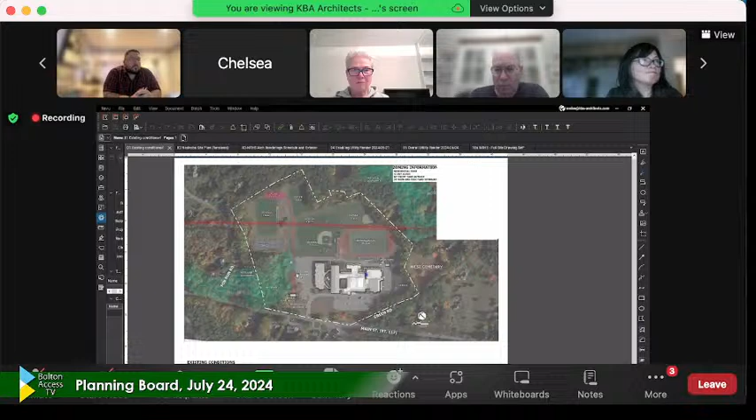That project, which is underway right now, is installing geothermal wells underneath the existing tennis courts, and also moving a lot of the parking up front in front of the school so that we have all the parking we need once school starts again in the fall. We're also rerouting all the utilities around the building and that force main so that we're not disturbing school programs in the fall. That's why we broke that out as a separate project, because we were in a rush to get it done.

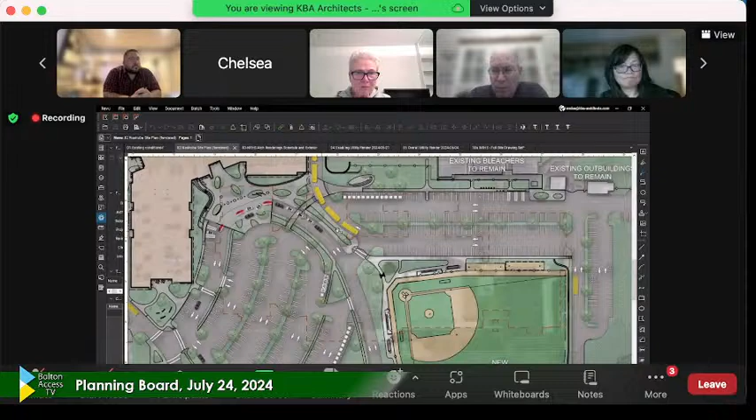So that's the existing conditions. This is the proposed site plan. The existing building is in here, outlined in red. We are building the new building just to the west and north of the existing building, leaving it intact as we're constructing it. Once the new building is online and we've moved into it, the old building will be knocked down and the athletic fields and parking will be constructed.

So as part of that, I'll go into what we're calling the enabling package, which is what's happening right now. That's this parking area up front, which we've expanded, and that's in process. We're installing three tennis courts, which are going to be permanent. This parking lot is temporary, but the tennis courts are permanent, so the school has tennis online, because we've taken the tennis on the east side of the site offline to drill a domestic well there.

And we've also taken the western courts offline for putting in geothermal wells. There's a series of geothermal wells there. If you're not familiar with geothermal wells, you're not extracting water out of the ground. It's a closed loop pipe that goes down into the ground and comes back up, so it's the water running through that closed loop that's providing the geothermal benefit. We're not removing water from the ground, which is usually a concern—just transferring the energy from the water to the ground. Correct.

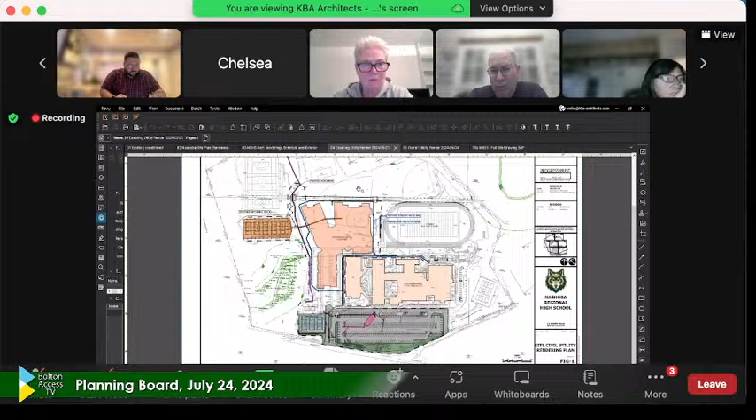So that's the enabling project. Let me get back to the site plan again. So once that's done, as I stated, the existing building will be torn down and we'll build the parking lot, the bus drop, and the baseball field.

What happens is when that rotary gets built, the idea for traffic circulation is that buses enter the new entry, basically where the existing entry is, on the west side of the site. Buses circulate around the back of the building, drop off at the east side—southeast corner—of the building, then circulate out, and only buses exit onto Green Road. Parents come in for drop off, stack along the driveway here, drop off at the main entry, then circulate out back to the rotary. So that's the traffic circulation happening there.

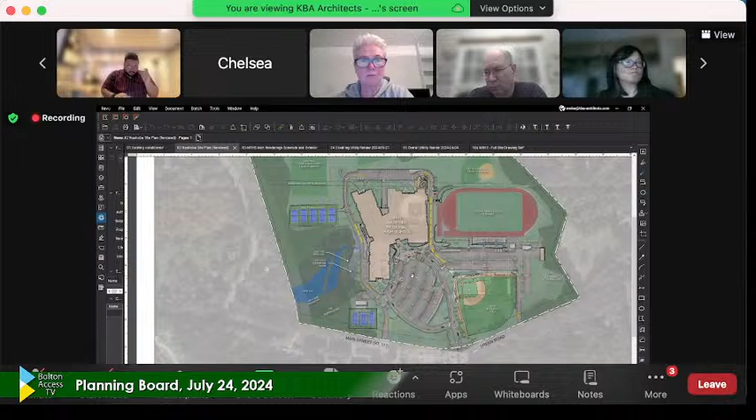As far as parking is concerned, we have all the handicap parking. Sorry, Eric—is the entrance on Green Road the same one that exists today? It moves maybe five feet to the east, but yes, it'll be pretty much the same one. Okay, thanks.

The track and field facility stays almost exactly where it is. The only things we're doing there are providing a new handicap accessible lift to the press box. To get everything in for this new building, we need to bolster the wall on the west side of the existing track in this location. We're also building a handicap ramp to get from the lower level of the school up to that track level. This track is about 14 feet above the finished floor level of the new school.

Once we're done with all that, the contractor is going to use where the existing tennis courts are or were for their trailer farm and staging equipment and materials during construction. Once they're done with that, the area gets remediated as far as regraded, and then we're putting in post-tension concrete courts, basically in the same configuration that is out there now, or was previously.

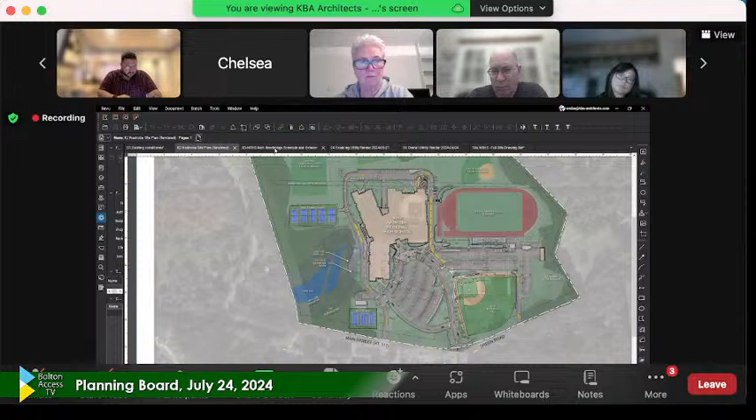Joe, do you want to talk about schedule a little bit? This is the schedule from one of our MSBA presentations.

The enabling package was bid and is underway. The purpose of that is to be sure that the school in the fall is construction ready, so that construction can proceed, but that any utilities, parking, or safety egress has been constructed previously, so the school can just open and function and not be working around the construction. That's a big push over this summer to get completed. It's always a summer slammer, as we call it, and that's on process now and underway.

Under bid right now is bid package 3. That is for site work, not including landscaping, structure for concrete and foundations, and elevators. Believe it or not, we're doing elevators because we need to make sure the elevator pits coming from the specific elevator company are in place so we can make the foundations the correct size. Also, elevators are notorious for people not bidding them, and they wind up getting put out to bid after as part of a general pickup package by the construction manager. We want to make sure we don't have a delay later in the process by having that bid too late.

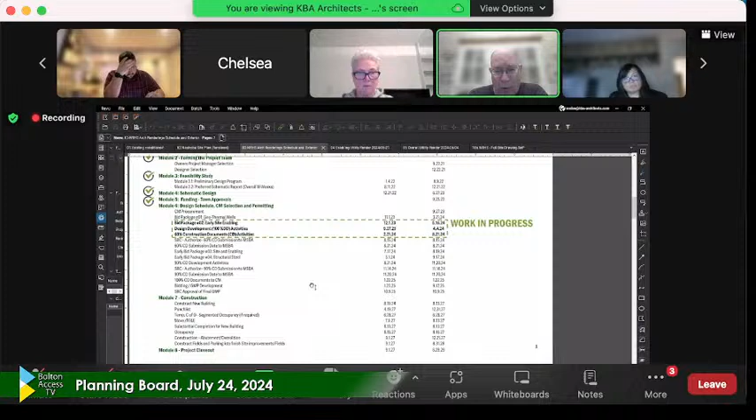Following that in October will be another early bid package, not on this list, because we've only just decided to issue it for pre-purchase of some electrical switchgear equipment and the generator. What our construction manager has found recently is that electrical equipment is taking up to 16 months to procure and get on site, and rather than have a delay in the working of the building, we've decided to give ourselves a few months of buffer to purchase that earlier than would be purchased under regular bid.

Through the electrical filed subbidder, and then coming up after that in January of 2025 will be when the majority of the project is bid for all the major filed subtrades: HVAC, electrical, mechanical, plumbing, fire protection. The architectural packages will bid at the same time: masonry, drywall, etc. That buyout will probably take anywhere from 4 to 6 months to complete, with a GMP expected sometime, I believe, in May or June.

Mary Ann, is that what your anticipation is also? Muted. Definitely mute. Okay, and that's really it.

Joe, real quick, that was... Hey Joe, go ahead, sorry. The dates, can you scroll up? What do the dates represent? The opening bid and when the bid closes, or when the work finishes? I just can't see a header on what those dates represent. Oh, there we go. Start and finish. Okay, yeah, it's generated from a Gantt chart schedule. Yep, okay.

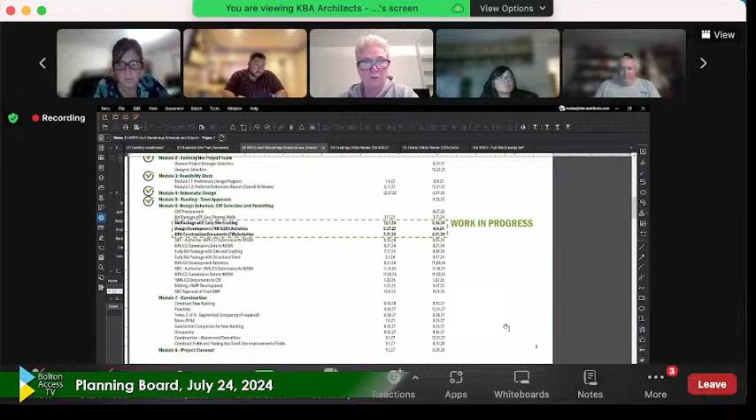So in the package you've got right now, you've got the site plans, the stormwater report, as well as some basic renderings of what's happening on the site, the basic floor plans we're working with, and some of the exterior renderings we're proposing for the site at this point. These should all be in that package, or if they're not, let us know.

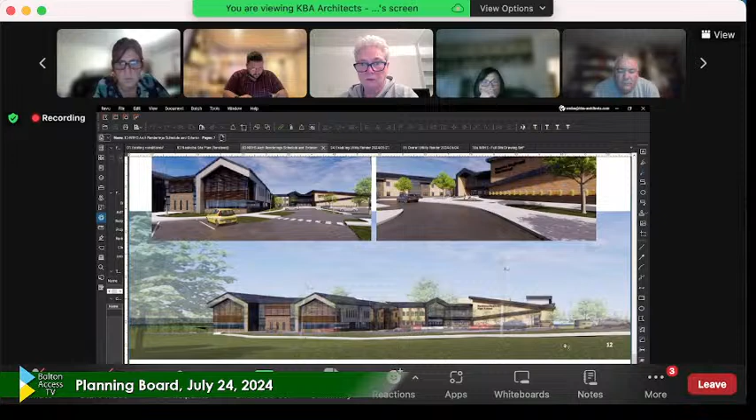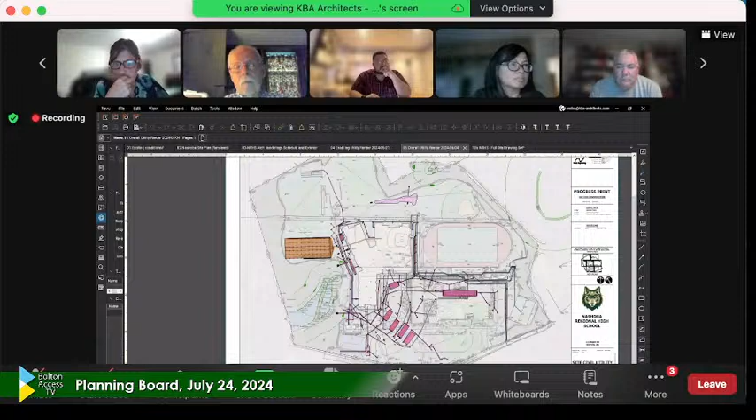So overall, utilities wise, there's a lot going on. We've been working with Concom on a lot of this. Concom has walked the site twice now. We just staked out some more stuff for them earlier this week, and they're going to get out there again hopefully this week. We're hoping they're approaching a point where they can vote on the project. We've been in front of them since May with the full project.

But here you could see a lot of these systems in magenta are the underground storage systems we're proposing. It's really a nest of underground systems, mostly because we're trying to work around the existing school building and trying not to rebuild as much as possible from what we're putting in temporarily and what we're doing permanently.

We are saving the existing outfalls at the existing wetlands where we can. And we are also creating some rain gardens, one in the back of the site, and there's one up in the front of the site also.

One of the issues is you'll notice we're not crossing that gas pipeline with any drainage. That's because Tennessee Gas gets a little jittery when you're putting a gravity-fed pipe over the pipeline, because that could always change during construction and that would throw everything off. So we've designed around that by getting all the drainage on one side of the pipeline and then having this rain garden basin on the other side of the pipeline going off into the woods.

How deep is the Tennessee Gas pipeline buried? Varies between 3 and 5 feet right now. You can't exceed 9 feet of cover. We've had extensive discussions with them, and actually Tennessee Gas's site work is managed through a company called Kinder Morgan, and their site representative has been on site virtually every day so far since the site work has started for the enabling package.

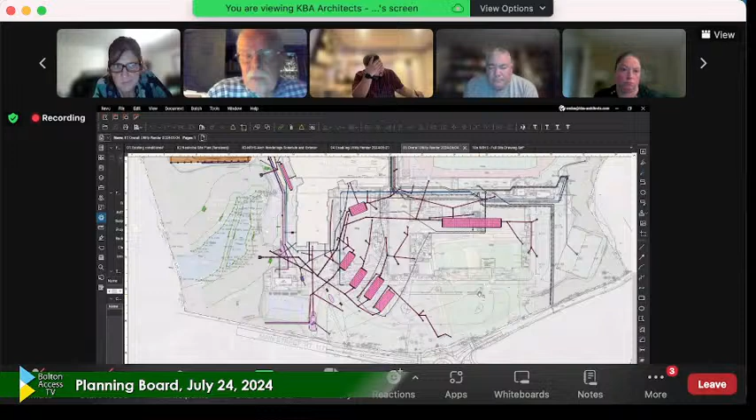Are you increasing the service going into the new school? No. Really? Okay. No, this is a new requirement that just came out in a recent guide from NGrid. We got an extensive back and forth with them a few times, and an extensive email from them explaining why — the gist of it was that they don't have the manpower to look at stuff twice. So give us the final plan and then we'll start.

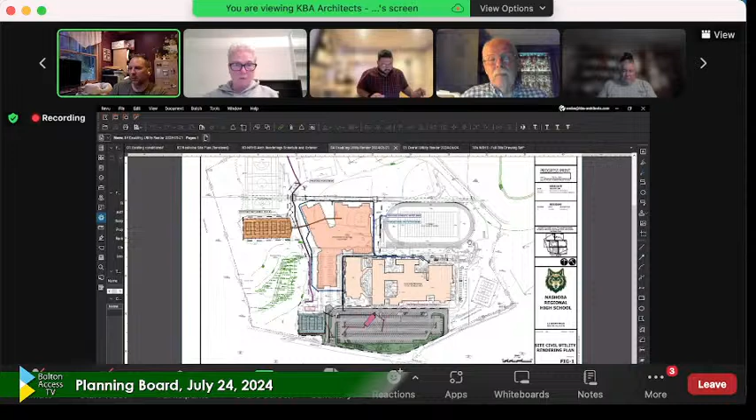On the previous sheet, the pink structures were all underground drainage, correct? Yes. And the goal is these are going to be installed now, presumably? They're on site now - just this one here is going to be installed now, and that stays in place. And that's sufficient for that size of the temporary parking lot you're putting in. Correct.

And then for the final phase, you're just going to tie into that and add on the additional - that one right there. Okay, I see. Exactly, yeah.

Can I have an additional question about the drainage? I understand that it meets state standards. This is a building that's going to be around for the next 50 years. Has anybody done climate change extrapolation of precipitation for this area, and whether this system, using the criteria and the state standards, would handle it?

We have not done extra calculations, but we can certainly look at that. Yeah, in view of wanting this building to be around and not be modified any more than necessary, that probably would be prudent. Yes, we've been discussing that internally as a standard practice through our company, so we'll go back and talk about that some more.

Thanks, and Chelsea, you broke up a little bit earlier - is the water being treated as it's discharged, or does most of it just discharge into the wetlands on the west side? Everything in vehicle areas gets treated through infiltration anyway - anything in vehicle areas gets pre-treatment prior to infiltration. So very little runs off without any sort of treatment, really only anything that goes on the grass. The tennis courts go into infiltration systems. Okay, thanks - so almost everything gets some sort of treatment.

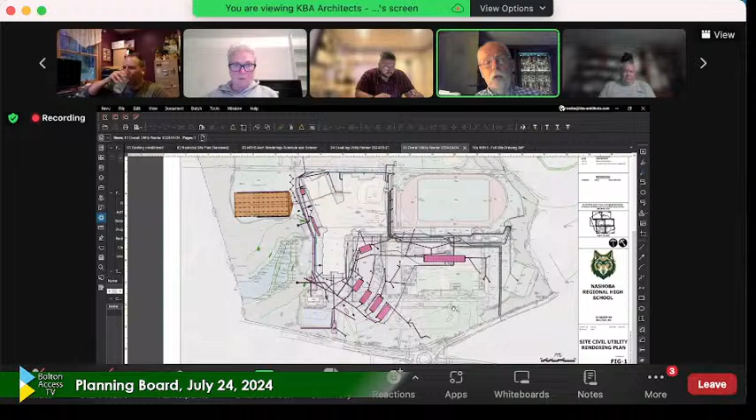And on that point, is there any kind of monitoring or oil water separation system to assure that you don't get anything from parking lots into the wetlands? We don't have monitoring, but there's an operation and maintenance plan that's required, and oil water separators as part of the treatment train that you will see in the reports. Good, thank you.

Yeah, this looks great, I'm really excited for the new school. My oldest daughter unfortunately won't get it, but my son will get 2 years out of it, so he's excited for that. Anyone else on the board - well, my grandkids will see it in 10 years.

Anyone else on the board or on the call have questions? I do - my question's on the gas pipeline. Can you speak at all to the setback requirements of the pipeline to the new school?

There's a 25-foot buffer straddling the pipeline that we're required to maintain. Anything that's crossing that, whether it's a driveway or a sidewalk or a force main for the septic, has to go through Kinder Morgan for their review.

The pipeline goes basically from like Tennessee or Pennsylvania all the way to Maine. It's got an easement that runs basically all the way up the eastern seaboard, and it's only tapped off when you have a major supply place to take off that gas. It's not necessarily high pressure, it's just high volume that's transferring it from one place to another.

The 25-foot buffer on the gas pipeline is considered by Tennessee Gas to be more than sufficient for the work going on, and the clearances above the pipe that we have to maintain, both for surface grade and for any crossing utilities, is also reviewed and approved by Tennessee Gas. Whenever we do any work within spitting distance of that pipeline easement, there needs to be someone from Kinder Morgan on site to observe and approve the work, so there are no mistakes or issues that would lead to a future problem with the pipeline.

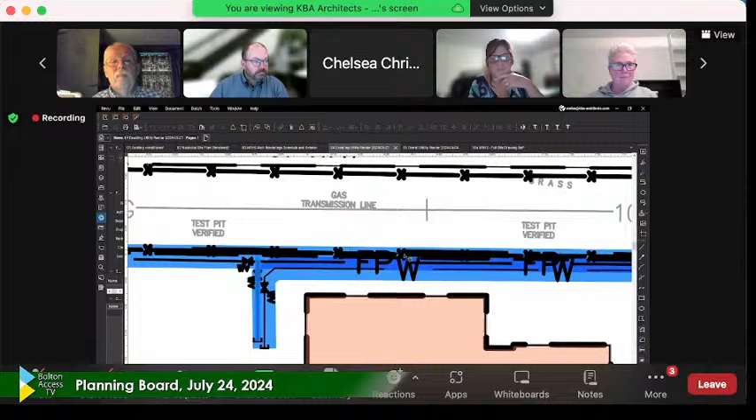We did have to do, last fall, some vacuum excavation along the pipeline to establish the grade of the pipeline in relation to the existing grade, and had it surveyed. There wasn't any real documentation as to that, since it was put in way back before the original school was built. So we had to do some documentation to verify where that was, so we could validate where we're crossing and the coverage we're going to provide.

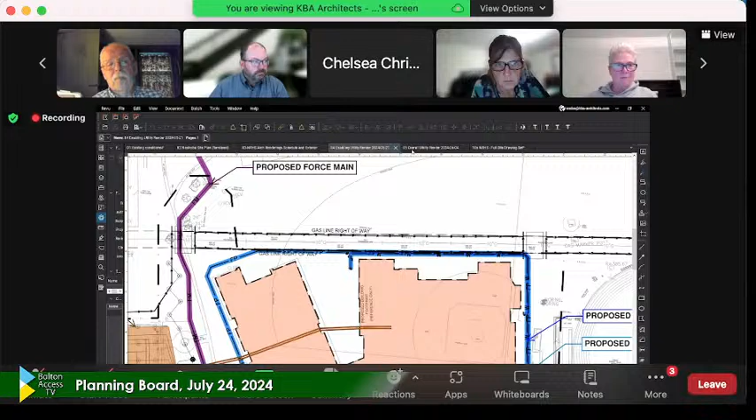I can ask the representatives from Tennessee Gas or Kinder Morgan what the pressure is in the gas line, if that's something you want to know. I am curious, seeing the proximity of the new building to the existing gas line, whether Tennessee Gas's regulatory agency is aware of it, or needs to be aware of it, or if there are any additional measures needed due to the new proximity.

Maybe an automatic shutoff valve or something like that might be needed. Yep, we can ask - it doesn't hurt to ask about the proximity. We can do that. Has the regulatory agency been on site, or the company? The company, Kinder Morgan, who manages the pipeline for Tennessee Gas, is on site.

I'm not sure who the pipeline regulatory agency would be. Did they pack the pipeline in the fall?

Is there significant variability in the pressure? If they pack the pipeline - what does that mean? I don't know what that means. Most gas companies, in order to accommodate increased demand in the winter, increase the pressure and use the pipe basically as a reservoir for gas. It increases the pressure at times and then reduces it substantially with demand. Okay, so you can ask that question too.

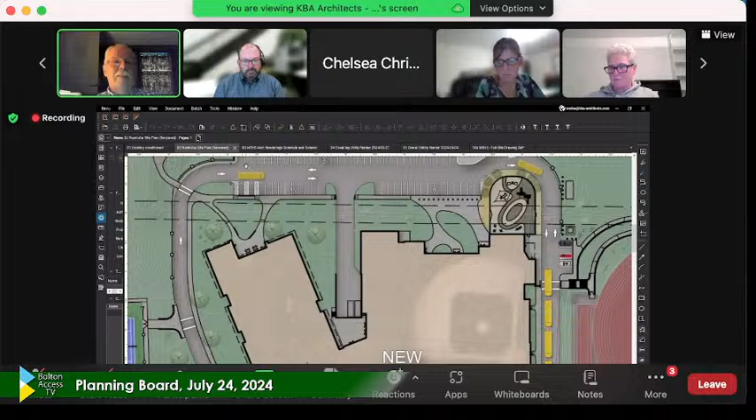That pipe runs through a lot of town. I'm sure everyone's aware when you drive around - Green Road, Harvard Road, Sugar Road, all that area. Although the building can't be on top of it, it wasn't as close before. There were playing fields, the baseball field was right on top of it, and the retaining wall for the existing football stadium is actually within the easement. They're not too happy about that, but we're not moving it at this point.

I'm not terribly concerned, I'd just be comforted by the answer.

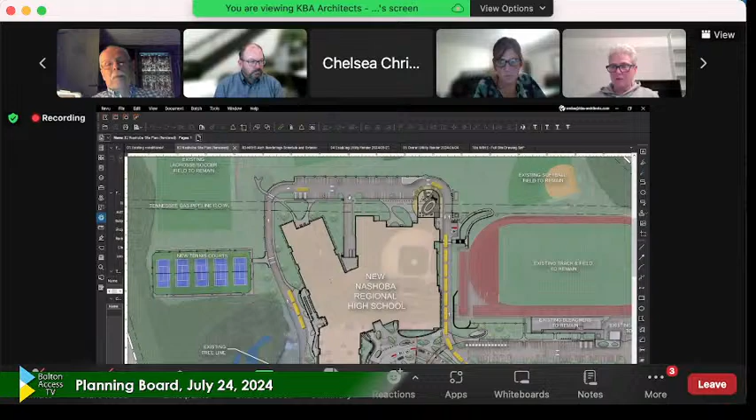In that drawing, what is the oval in the upper right, above where the bend is? That's a buffer zone - it goes through the playground, an outside playground with a little trike track for pre-K. There are two pre-K classrooms at that corner of the building. I see, okay, and that's an exterior playground.

You guys answered my questions pretty good. To wrap up, what I was getting at was, it would be nice to know there's no change in the class of pipeline due to the building being shifted, and no setback needed due to the new occupancy and distance. It would be nice to see that in black and white - I know people have been out there and everyone's aware of it, but it would be really nice to see it in writing saying no additional safety measures or setbacks are needed. We can get that to you.

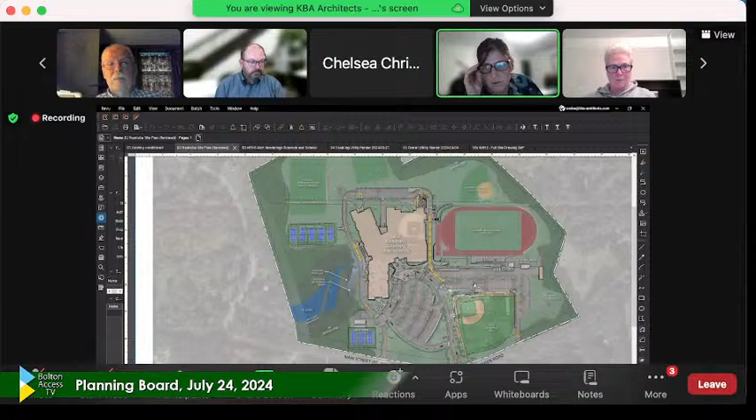I have a question about parking during construction, if I can, through the chair.

Eric, how many spaces are currently on site, and how many will be provided in the fall when you're finished with the temporary parking area? There are 400 and change existing on site. With the temporary parking area we're pretty much matching that - I think we lose about 5 spaces. And then you have 440 on your final site plan, is that correct? That is correct. Okay, thank you.

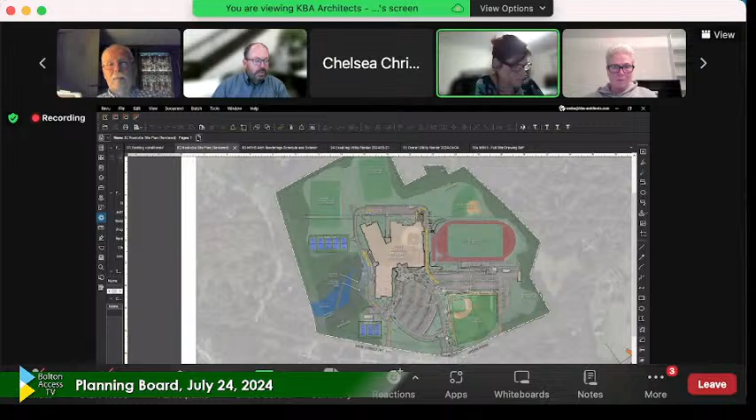So folks know, to be totally transparent, the contractor is negotiating with some folks across the street to provide additional parking for contractors' employees' vehicles, and different places in town they can either shuttle to or walk from to get to the site. Can you clarify those are passenger vehicles? Yeah, construction vehicles aren't allowed to park in those areas - it would only be pickup trucks and cars that employees coming into the site would be using. We don't allow construction vehicles to be parked elsewhere and idle, and we don't allow them to stand and idle in the driveway.

Eric, can you zoom in next to the tennis court? Right now you can see the 3 lanes coming out next to the parking lot - that's basically the existing exit from the high school onto Main Street. Beside that, on the other side of the construction fence, is the construction entrance. The gate is set back at the upper right-hand part of the tennis court so vehicles coming in don't queue up onto Main Street, and they're not allowed to idle. They come up to the site, the gate opens, they come onto the site, but they can't sit in front of the gate and idle. That's something Consigli CM is very conscious of.

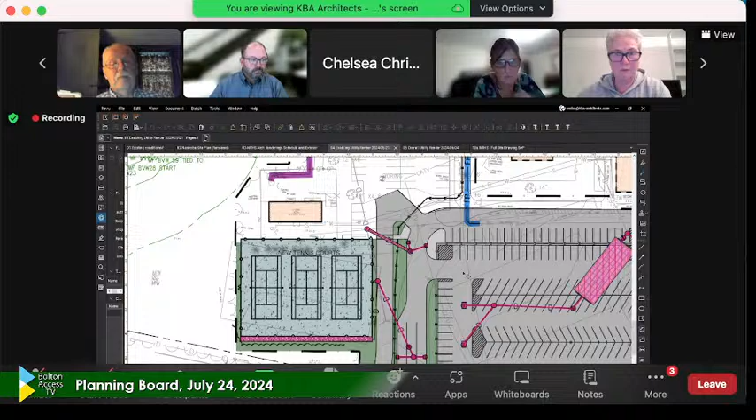Just as a point of note, KBA, Consigli and Skanska were the team that worked on Attleboro High School, which has just recently been finished. A note is that they had the same kind of truck routes and concerns from the neighborhoods in Attleboro, since that school is nestled within a community of residential houses. They basically terminated the contract of one of the delivery driving companies for delivering stone and site stuff to the site, because they were consistently taking the wrong turn through a neighborhood since it was a shorter trek instead of going the long way around on the specified route.

So they're very conscious of it. They want to keep a positive relationship with the neighborhood and with the town, and will be diligent in making sure truck traffic and truck parking is managed to everyone's understanding.

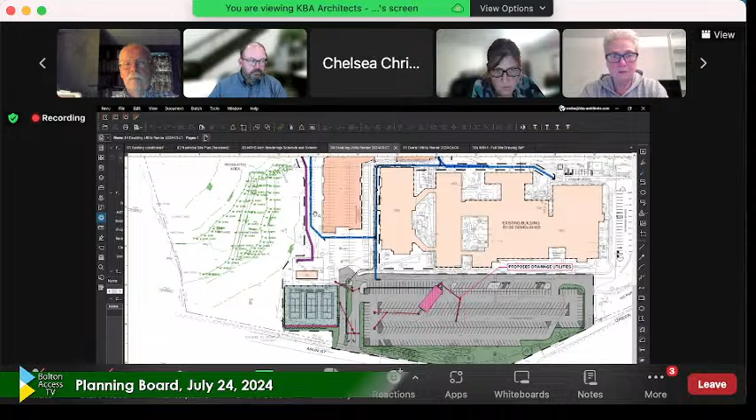So this screen is what the parking is gonna be basically for the next two years, correct? Yes. And so you're getting the additional spaces that you've lost on the west side by basically bringing the parking lot closer to Main Street, is that correct? Yes, partly closer to Main Street and a lot closer to the driveway next to the tennis courts.

Okay, there's a large green space between the driveway and the existing parking lot that goes away temporarily. And I know there's a lot of trees on the Main Street part, I see those on the plan - are those all staying or some going? The existing trees, these ones down here right along the street are proposed to stay. Some of the ones set back a little further are going.

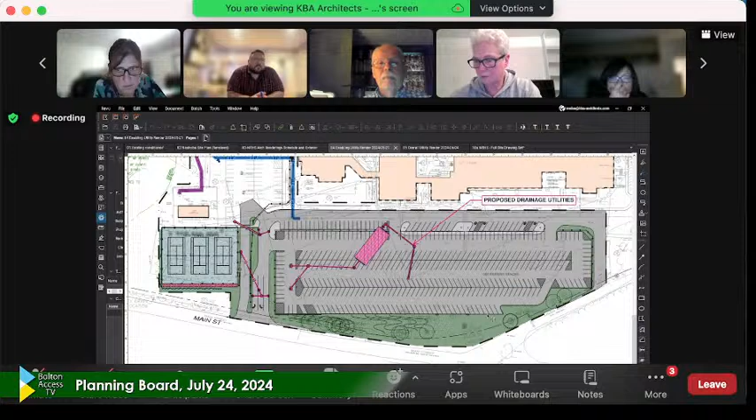And the traffic flow is gonna stay the same as it is today, is that correct? So the bus comes in on the Green Road side - the bus traffic will be coming in the same way it comes in now off Green Road, and then queuing in front of the building as it does now, except hopefully in a single queue rather than a double queue, and then exiting on the west driveway going out onto Main Street, as it does now.

Parent drop-off will come in and go up around, and the students will enter on the auditorium entrance on the east side. So is that similar to what it is currently? Well, it's similar - right now the parents drop off in the first aisle of the parking lot in front of the school, and the kids have to cross the bus traffic to get into the school.

This is actually, I think, a little bit safer, because the parent drop-off is dropping off immediately to the entrance going into the auditorium, totally separated from the drop-off for the buses coming and going. Buses in the morning aren't like they are in the afternoon - they don't come in and stop and stay there and all leave together. They come in, drop off, and leave. So there's a constant movement of traffic in the morning that won't have parents, students, and buses crossing each other as it does now, so it's actually a little bit safer of a drop-off process than it is currently.

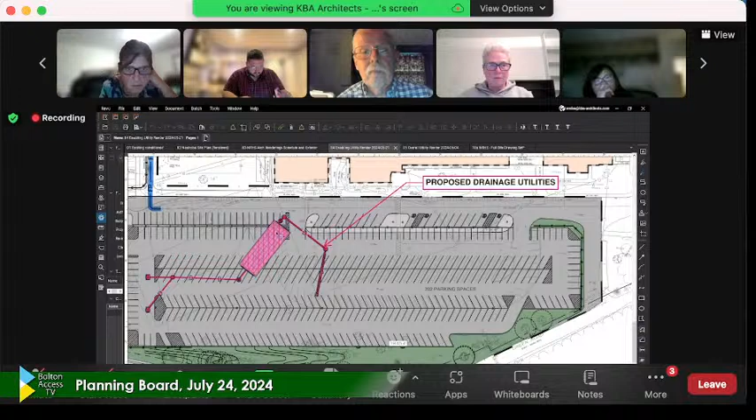And the new spaces you're getting, is the existing parking lot staying and you're just adding on to it? For the enabling, yes. I'm mostly concerned with enabling right now for this one, because all the west spaces have been lost at this point, right? That's all construction now - I don't know if you've already done this work.

It's in the process of being done now. They ripped it up, they have the hole dug for the pink retention structure that's there.

The Quonset hut-style retention structures are on site right now, ready to be installed. The parking area, from halfway across the parking lot to the left-hand half, was grass that has been removed, with the soil stored, and that will be paved by August 15th. So this parking lot will be complete as shown in this diagram by August 15th.

Is the existing parking lot staying the same, or is that all being ripped up as well? The part that's staying is being restriped, so you can see the old striping underneath.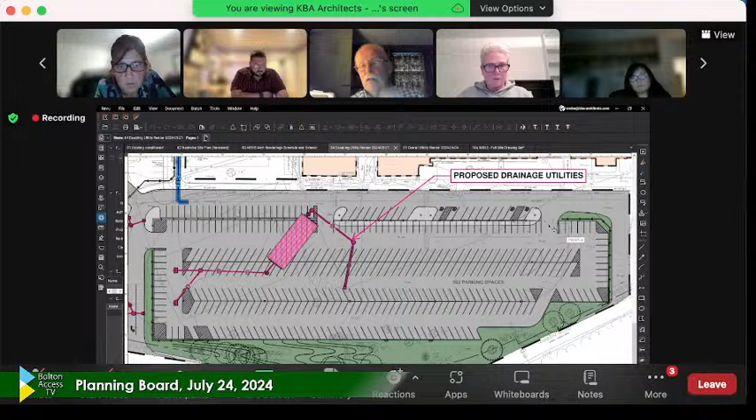You can see in gray tone where the parking lot underneath is, where Eric's cursor is moving — that gray tone is the existing parking lot. It's extending one aisle to the south, to the bottom of the sheet, and further to the west, to the left of the sheet. But it has to be restriped to work with the new paving pattern. So are you sealcoating over it to hide the old stripes? I could imagine that being chaos with faint old stripes and new stripes.

The old stripes are getting blacked out before the new paint goes down.

So the current schedule is for August 15th to have that completed. Basically, yes, and it has to be in place before people come back to school — that's the point of the enabling work. The teachers come back the third week of the month, so we want to make sure this is available for them as they come in to set up their rooms and do orientations.

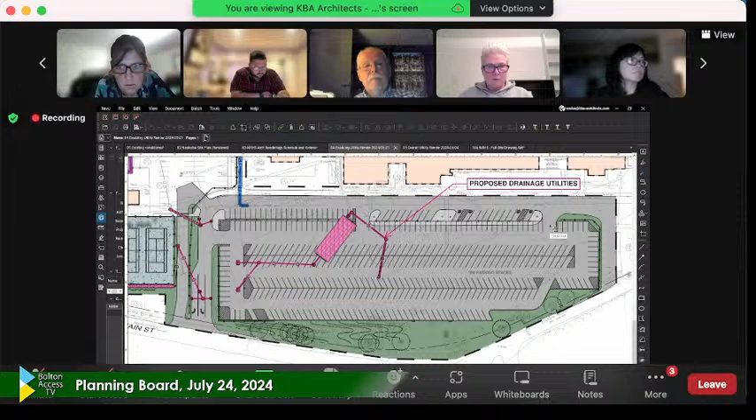The students don't come back until the last week of the month, I think the 26th. But all of this has to be ready, and there will be training with monitors and bus drivers to make sure things are used the right way so the drop-off process is seamless when school starts. In fact, we're meeting with Consigli and the school district next week to go over that exact process and how they can get material out to parents and bus drivers to make sure everything goes smoothly in August.

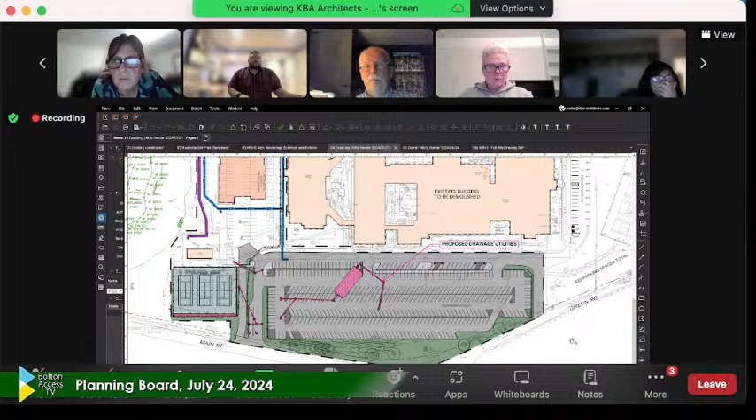So the life cycle of this parking lot is two or three years, and then you rip it up for the final configuration? Yep, and then it gets put into the new configuration that Eric showed on the final plan.

Is any of the work on the enabling phase contingent on our approval here? I know our peer reviewer is going to go over some of this — what is your schedule, maybe that's a question for Pam. Yes, you do have jurisdiction over that phase. They had to proceed early just to ensure the school was ready for the fall and the site could be accessed, but you do have jurisdiction over it.

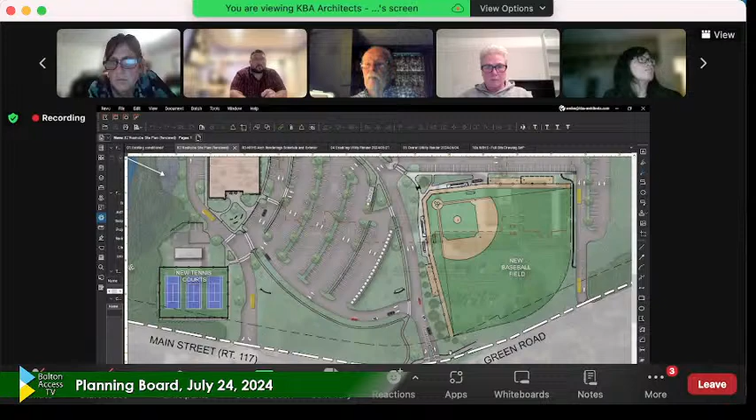Good morning, identify yourself. Good evening, folks, my name is Scott Morrissey. I'm a neighbor at 34 Fox Run Road. I could basically throw a rock to the backside of your project there.

Those of us who live on Fox Run Road like the idea that, for the most part, when you're done, the impact to us — the tennis courts and that ball field up there — are all going to be the same. It's going to be like it was when you started, which is very nice.

Just a couple of concerns I've got are the impact to the flow to the wetlands. I'm your neighbor, I'm on Tennessee Gas Pipeline land on the other side of Fox Run Road — that's my lot. So when the water flows down to your wetland areas, is there any chance that goes on the other side of Fox Run Road, over to the other side of the Tennessee Gas Pipeline? Or is that all being contained on your side of the Fox Run Road area?

It's all going down, or the majority of these areas drains down to the wetland on the west end of the site, which flows toward Fox Run Road. However, it should be noted that the existing site and all those existing parking lots don't have any water quality treatment. And the only detention right now is the existing basin, which was built back in the 90s. So all those systems are intended to reduce peak flows and slowly let out water over time.

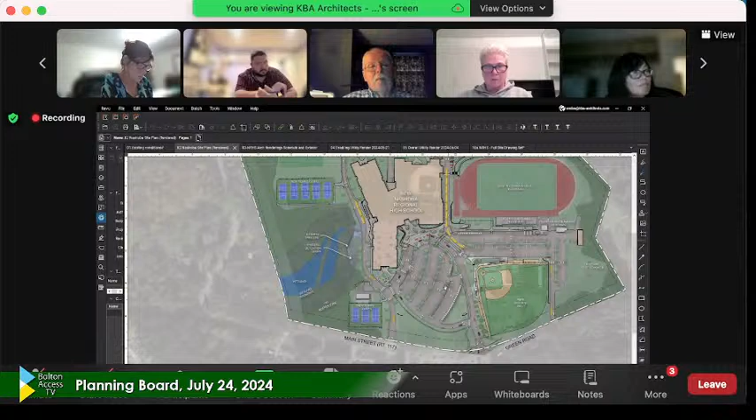No, moving into the new school. The demolition of the existing school and the construction of the new baseball field and the rest of the parking lots will take another year and a half.

I just gotta break it to my wife gently that she gets to hear the machines running for only 3 more years, I gotta try to stress that. It's only 3 more years, so. All right, I got it. Thank you folks very much, I appreciate your work, I know it's not always easy, so. Thank you for what you're doing.

As some form of consolation, the work you're hearing right now is probably the well drilling for the 800-foot deep geothermal wells going under the existing 5 tennis courts, right on the other side of the lot line from you. That work is expected to be completed by the beginning of October, at which point it'll be paved over and used as a trailer location for some of the construction trailers. So that construction work close to you will be done by October, and then it'll pick up again when the old building is demolished in a couple of years.

Well, I appreciate what you guys are showing, and my personal experience has been that even if you don't want to say it, you always pretty much tell us like it is, which is what we need to hear. So I appreciate the frankness, guys. Thank you all for the work you're doing. It'll be very nice when it's done, so nice work.

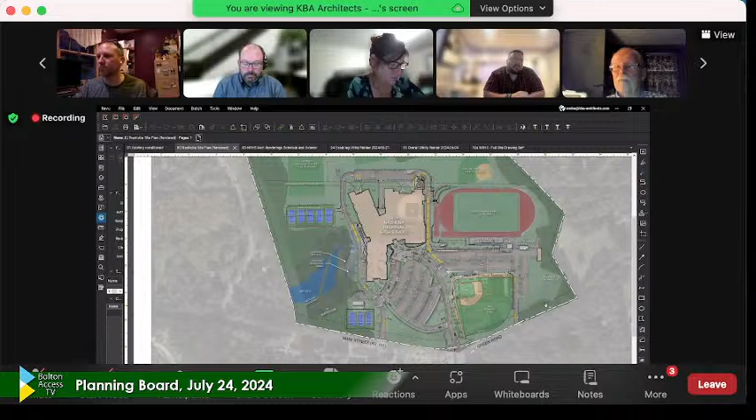Thank you. I have a quick question, Joe, excuse my ignorance - are you the super on the job? Joe is the project architect, so I'm the lead architect. Yeah, I'm the lead landscape architect.

I hope this goes to the planning board. Well, I know it does. I will say Consigli is one of the better contractors in New England, and their due diligence will be greatly appreciated. They're one of the better general contractors in the area, and I'm glad they're on board about it. So my two cents - that's how I feel about it.

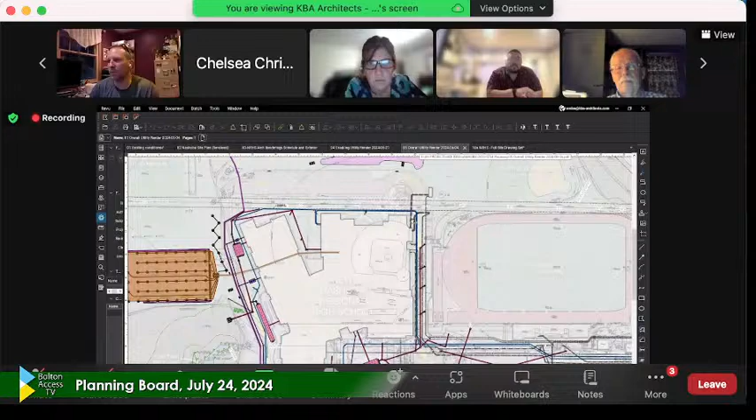Thank you. I joined a bit late, so maybe I missed this, but does the site plan for the new Rotary conflict with this site plan, or does this plan take that into account? So they did cover that a little bit earlier. Okay, sorry. If you want to say something briefly about it, that's fine, but I plan on listening to it, so you don't need to repeat.

Well, we just want to say that we've had several meetings with the DPW and the engineers designing it to coordinate the location of the off-ramp that goes up to the school. The site plan that we've developed is based upon utilizing the Rotary as part of the work. I guess that has been delayed a little bit since it was supposed to start in summer 2023, but we are counting on that being part of the work. Our site plan is designed around it, and we've had extensive coordination with Beta Engineering and with the DPW.

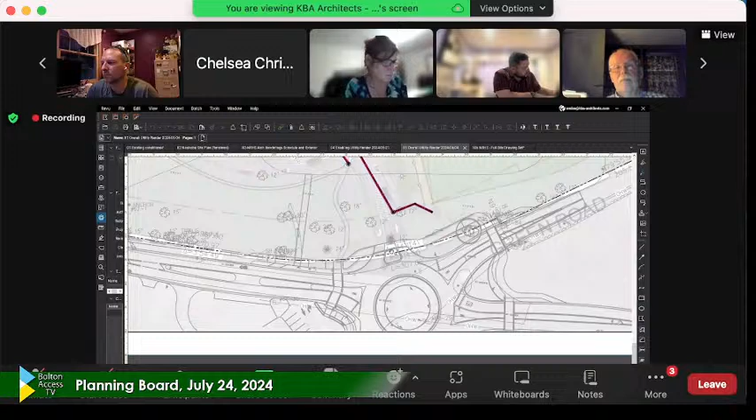It was initially not part of the enablement work, so whether or not that's delayed doesn't affect the work. As long as it's done in 2.5 years, it doesn't bother us at all. We hope it is - I'll go listen, but where the current Green Road entrance is, once the Rotary's there, is that going to close, or will that still be there?

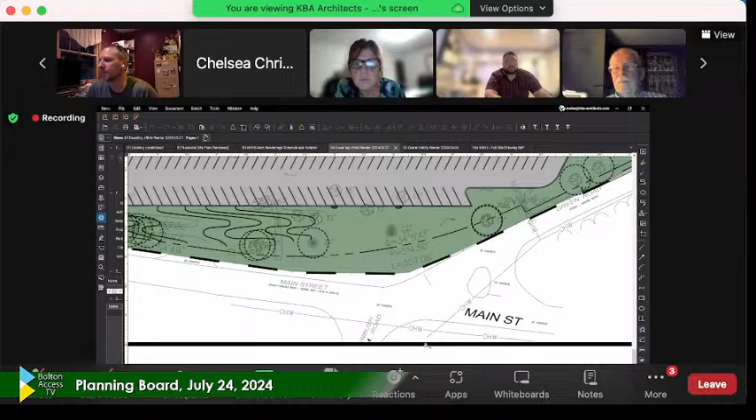No, it'll still be there, but it will be gated and for bus exits only. Got it. And for emergency access by police and fire. Yes, it's an emergency access road, so we don't have parents queuing on that or waiting for kids to get out of sports events or stuff like that. That's a restricted road for buses and for emergency access. Thank you.

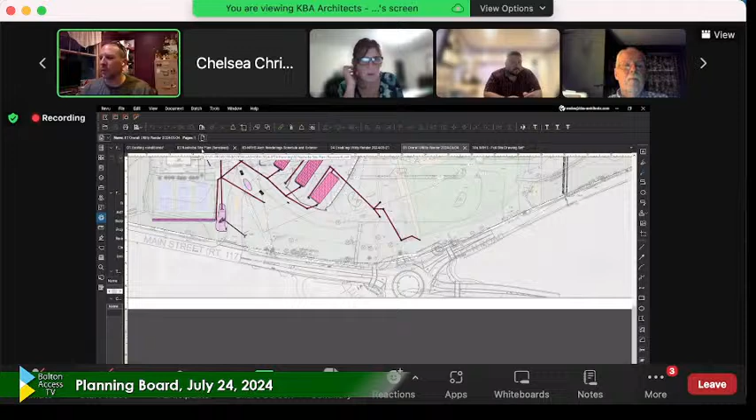If there's no other questions from the board, then Pam, do you want to talk about what our next steps are? Yes, because we don't have in-house services to review stormwater, we've sought a proposal for peer review from Haley Ward. As you know, the planning board typically utilizes Nitsch Engineering for peer review, however they were the designer for this site plan, so that doesn't allow them to review their own work. So we reached out to Haley Ward, who previously met with the planning board, and they provided us with a scope of work to review the proposal. It's quite extensive - it includes stormwater, architectural, traffic review, and site plan review as well. I distributed it to the applicant late this afternoon, as well as the board members. They're ready to proceed and will attend future meetings and site visits as well.

Pam, we discussed briefly the scope of the review that we need done - I know they included architectural and traffic, is that required for part of this? A traffic report is required as part of site plan review, so if we don't find it necessary, the planning board has the ability to waive that requirement, and we do not have to have a full traffic report studied. However, we would request that they review the internal flow and egress and entrances and exits to the site to ensure that the traffic will flow smoothly and not have a negative impact on the abutting public ways.

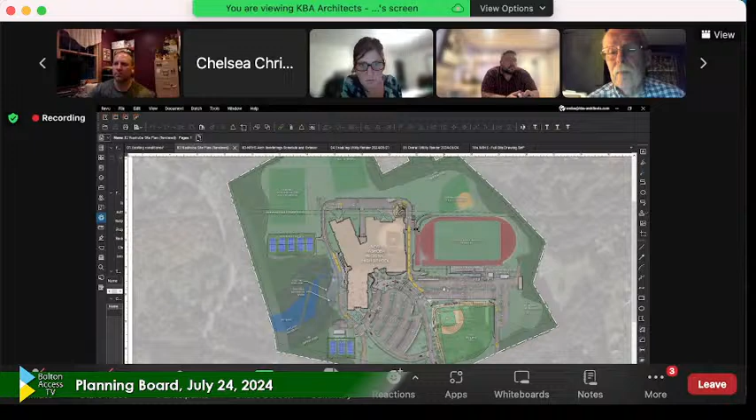Well, that's what I'm trying to understand, like, for instance, where the buses drive in and out. In subdivisions, when a road's going to get turned over to the town, of course we really care about the quality of the work. But ultimately, I don't know if it's the town or if it's weird with it being regional, how that all works. I was just trying to wonder the dividing line of what we're responsible for reviewing or not.

I think whether a project is private or public, we want to ensure that it's constructed in accordance with plans. So there should be points identified throughout construction that maybe we want witnessed by peer review, for instance the installation of the subsurface stormwater system. So things like that we can specifically condition for inspection as you move forward with your approvals, if the board would like to consider that.

Well, that's what I was saying. You are dealing with an exceptional company. I mean, they're local, and from what I understand, they're on point. So, Joe, you want to talk about some of the MSBA requirements and some of the reviews that they require us as part of the construction process?

Well, we've already started meeting for what we call owner-architect-contractor meetings, OAC meetings, on site. The MSBA, Massachusetts School Building Authority, that is funding part of this project with the district, will be starting to come to the site once actual construction starts and we get out of the ground. They'll be on site probably once a month, looking at the building and grounds as they're developed.

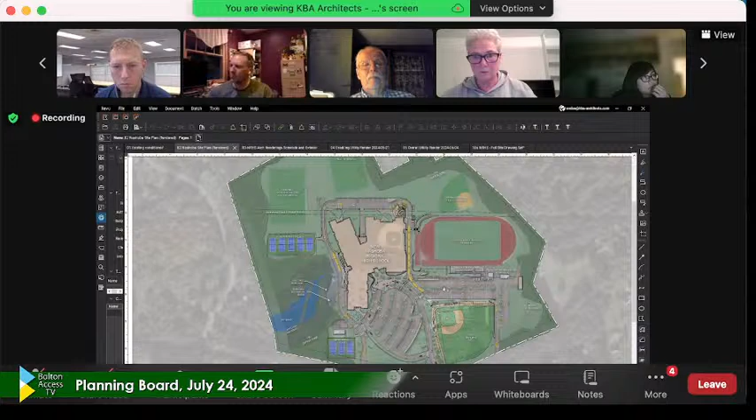And then we also have commissioning agents required to be part of the project, also paid for by the MSBA, that monitor a variety of things, including the building shell. They come out and do construction and testing on the building shell for thermal and waterproofing, and they also review the interior and energy consistency of the building. So there's a lot going on.

This is also an affidavit project, so we will have site visits from the design team, some on a monthly basis. And not only that, but as required by code, we will engage a company for material testing, monitoring compaction, concrete, structural steel welds, things like that. So lots of belts and suspenders, and full-time field rep and full-time representation from Consigli on site.

So there's a lot of checks and balances across the project and all the different disciplines. As I said, we have the same team as we just finished Attleboro High School with. We're looking forward to this project coming out as well as Attleboro did, very successful budget-wise for a school.

Yeah, Pam, I think for now we can just engage Haley Ward to review the stormwater and those plans, and then proceed from there. So you need a vote from us, from the board, to contract with Haley Ward to conduct peer review services for review of the site plan submission by the Nashoba Regional High School.

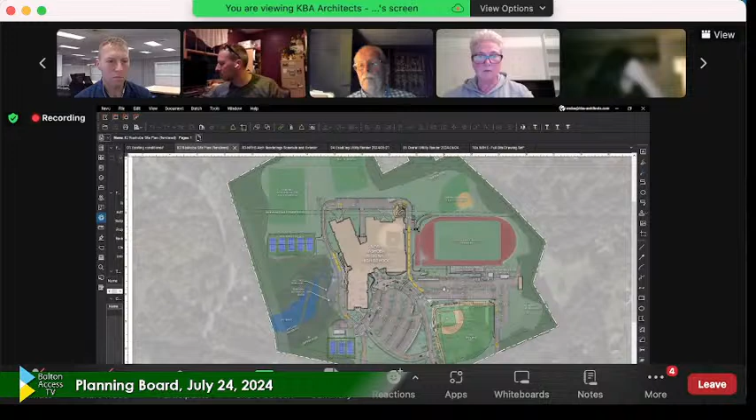The highest roof of the building is 50 feet at the stage of the auditorium. There are several areas of the building that are at 35 feet high, like the gymnasium, which requires certain minimum clearances for MIAA volleyball and basketball. That 35 feet is also in the cafeteria and the auditorium, so that we can get the right clearances. Typically, the floor to floor height is 14 feet.

So the 2 floors to the roof are 28 feet. But then the zoning also includes mechanical equipment and roofs, and since the guidelines from the zoning also require us to provide sloped roofs to emulate the local residential architecture, that brings us up well over 35, 38 feet for the height of the roof.

I think the main reason for that bylaw is fire apparatus, not safety. Right now, the town of Bolton doesn't have any fire apparatus that can serve the existing school, and has a mutual aid requirement with the town of Lancaster's fire department. That would continue into this building. We've had 3 meetings with local fire and police officials, with another coming up in mid-August. And that requirement has been accepted for what we were doing.

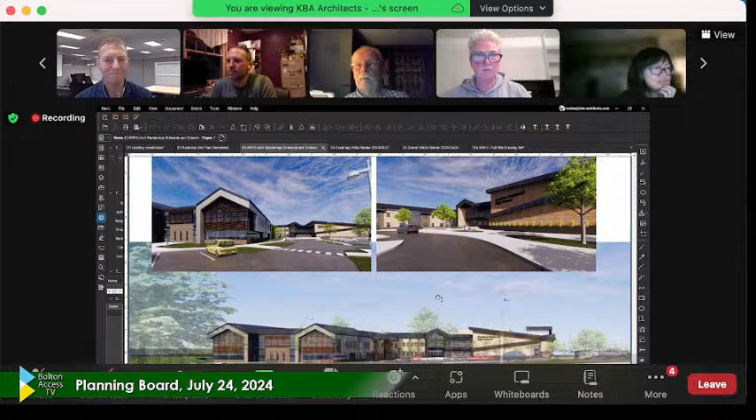So, even if you had a building 30 feet high, the town of Bolton couldn't provide a fire truck that would get there. I think the 41B, they're going to have on-site ladders or something. I forget what the final solution was for that.

Okay, anything else we need to discuss on this? No, just a date to continue the meeting. Did we set our next meeting yet? This hearing, do we need to continue this, Pam? We can't just put it on the agenda, we should continue it to a date identified at the meeting.

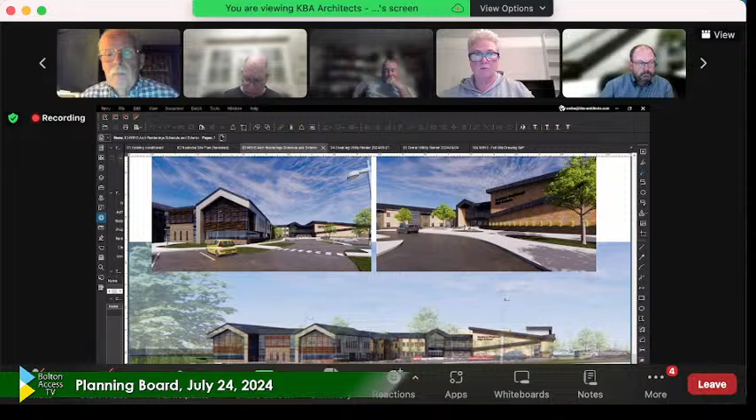I think we were initially looking at the week of August 19th. Was that correct, or the 21st? But then Pam had a conflict, so we were going to do the 20th or the 22nd, and Bob, I think this was a master plan review also. So was there a particular day that worked better, the 20th or the 22nd? Master plan's typically on the 22nd, but I'd like to avoid impact with the select board. Can we do August 28th? Sure, and that would be a regular Wednesday if everyone is available to attend. That's fine, fine by me, I'm clear.

Okay, so I'll make a motion. Oh, sorry, is the payment required before the contract is signed with the peer reviewer? Yes, we can't enter into contract without available funds, so unfortunately we'll work to get you that as soon as possible. We can take that offline with the district if we need to, okay.

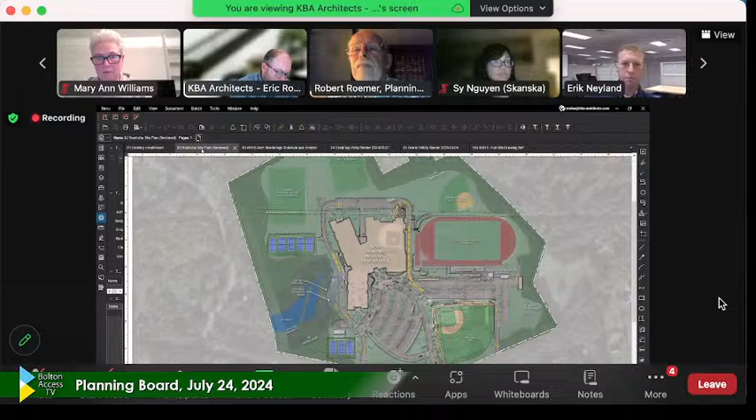Michael Gore, Aye. Michael Lau, Aye. Robert Roemer, Aye. Erik Neyland, Aye. James Barr, Aye. And the meeting's continued till August 28th.

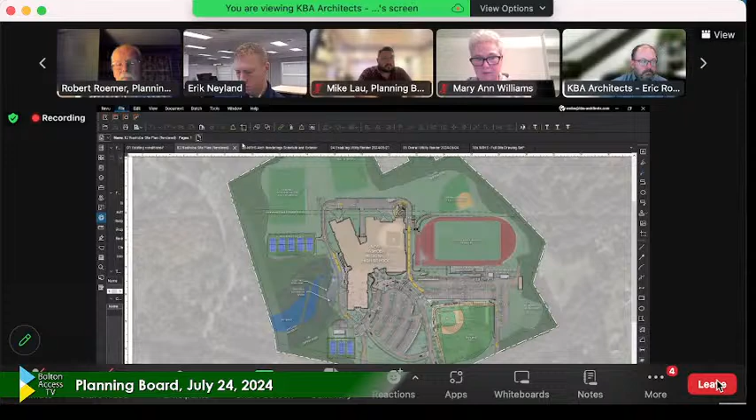Before we adjourn, is there a way for us to get an invoicing so we can get the district to pay for that $40,000? We have a proposal sent in your email, Pam. Is that going to the town of Bolton, or directly to Haley Ward? It gets paid to the town of Bolton, and then Haley Ward will invoice us, we'll copy you and pay Haley Ward directly. Any remaining funds are returned at the end of planning board review. We're also going to amend the scope to eliminate the architectural review.

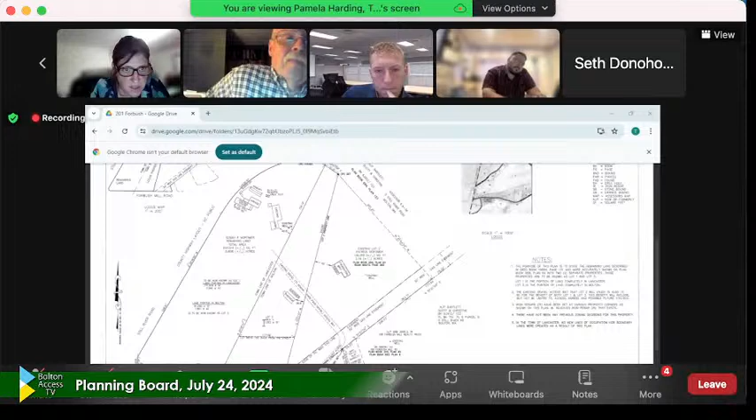This property is actually located in the town of Bolton and Lancaster. Lot 3 is part of the Mortimer land located in Lancaster, and they're creating a lot line along the actual town line. It creates one building lot consisting of 81,092 square feet and 200.04 feet of frontage. So the house on the left is the current house, and the one on the right is the one that was just built, with the driveway going up. Yes, this 201 was, lot 2 was created in 2021. And so now there's gonna be a third house down in that area.

Correct, there's no proposed house. My mother passed away in 2022. My brother currently lives in the house in Lancaster, I live in the house in Bolton. We're looking to subdivide the Bolton land from the Lancaster deed, so I take possession of all the Bolton land and he takes possession of all the Lancaster land and house. There's no house proposed at all for the middle lot. We're just dividing it off the Lancaster deed so my brother can deal with Lancaster and I can deal with Bolton.

Oh I see, so the line to the right of the cursor now, that's already there. Yeah, so the Lancaster land has the Lancaster portion and the Bolton portion in the deed, and he got paid dual taxes to two towns. We're trying to eliminate that. But so lot 3 is a buildable lot, it meets our shapes and frontage and everything, and it's fully contained within Bolton. Yes.

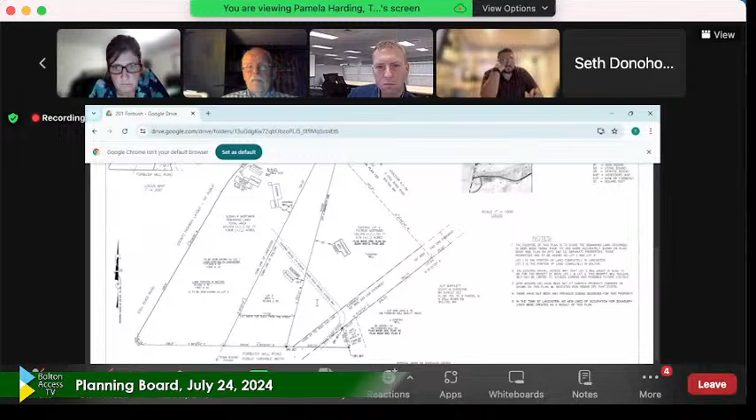Looks good, straightforward to me, no issues. Does anyone on the board have questions? No, no. Okay, I will make a motion to approve the ANR for 201 Forbush Mill Road.

Second. Michael Gore, Aye. Michael Lau, Aye. Robert Roemer, Aye. Erik Neyland, Aye. James Barr, Aye. The endorsement is approved by a vote of 5-0. Thank you for your time everyone, good luck. Thank you.

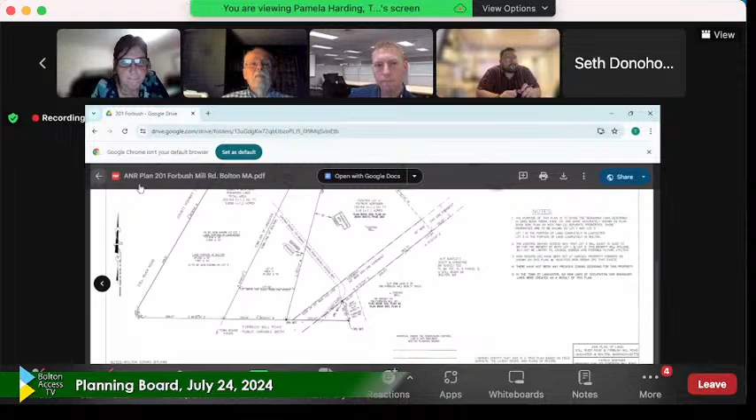Next item on the agenda is an ANR for 422 Still River Road, and this is a creation of an unbuildable parcel. Do we have someone representing the applicant? Good evening, Mr. Chair, this is Seth Donohoe with Dillis & Roy.

Hey Seth. I'm here tonight on behalf of the applicant, Black Pearl Development Group. They are the current owners of 422 Still River Road. We've submitted an ANR plan to allow the existing dwelling to meet the zoning requirements, and there'll be some remaining land, which is a non-building parcel. Would you like me to bring the plan up? That would be great, thank you. So what you're seeing is the existing dwelling, that's number 422 Still River Road, just south of Vaughn Road here. And then this other house is the one you're renovating or expanding, I believe.

I drive by this one, it's right near my house. Correct, yeah, it was renovated, so a well in conformance with the Board of Health requirements was put in, as well as a conforming septic system in the front of the house at this point.

And there's some remaining land with the parcel, so the proposed lot 1 will exceed the minimum 80,000 square feet and 200 feet of frontage. And parcel A is just over 71,000 square feet. It does not have enough land to be a building lot, and it's been labeled as such. So I believe it's a fairly straightforward ANR plan, but if the board has any questions, I would be happy to address them.

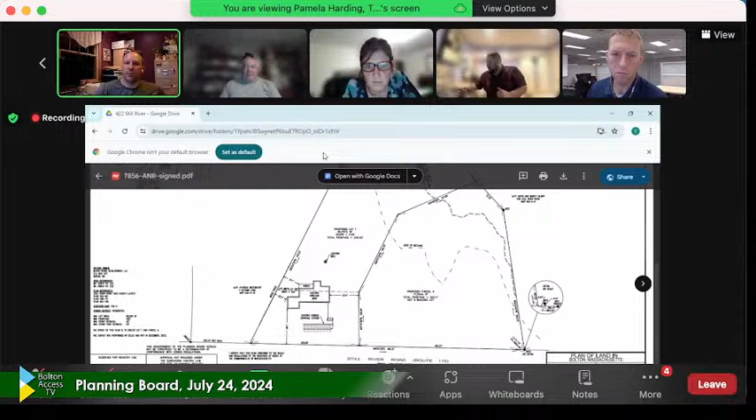Consigli is a good company, so we're actually in really good hands with them. In my experience, I was looking at the renditions that they had, and it was like, okay, that's different than normal. It's beautiful. I mean, so hang on, we're getting a little off topic here. Sorry, you're right.

This agenda item is to reappoint the three members to a 1-year term on the DRB. The current members are Michelle Tuck, Danielle Spicer, and Natalie Gabrielle. I contacted all three prior to the meeting and they are interested in being reappointed. So I will make a motion to appoint the existing current members of the design review board, as named by Pam Harding, to a 1-year term on the design review board.

Second. Michael Gore, aye. Michael Lau, aye. Robert Roemer, aye. Erik Neyland, aye. James Barr, aye. Their appointments are approved by a vote of 5-0.

Mike, let me just ask one question about that. They are brought into a project at the pleasure of the planning board. Is there any criteria to establish when that might occur and under what circumstances and with what type of project? If they were looking at the assisted living facility, which was quite substantial, and had never been involved in a high school, I'm curious about why that didn't occur.

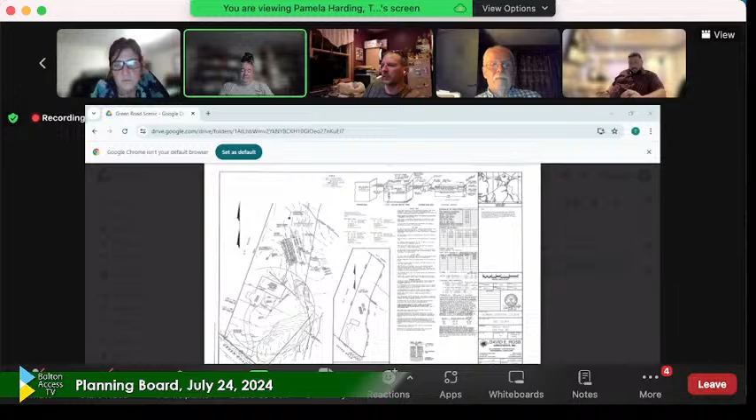And so they're not taking out any large trees, they're taking out the small trees that are right there, but those don't trigger the shade tree hearing because of their size. Yeah, it has to be over 6 inches. I didn't see any trees there that are over 6 inches, so. Yeah.

Yeah, it was at one time, I'm sure, but I checked historical aerial photos just to make sure it wasn't a recent kind of rearrangement. The wall's been like that for quite some time, so it wasn't anything recently done. Well done.

So yeah, I don't see the need for a scenic road hearing for that, but if board members have other thoughts, please share them. I don't. Neither do I. Okay, great. Do you want to vote on this, Pam?

Yeah, just to clarify, I can send him a letter to document that the board reviewed it and didn't find it subject to the scenic road bylaw.

And sorry, what number Green Road is this? There is no number assigned to it yet. I would just refer to it as Lot 1, Green Road, owned by the Zekas at this time.